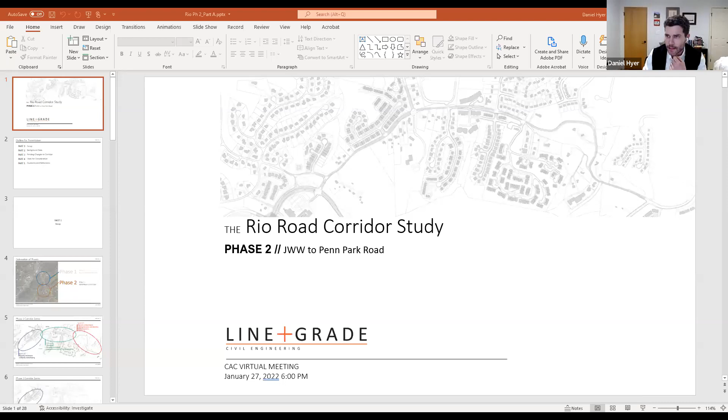So tonight, Rio Road Corridor Study Phase 2, and we'll be discussing specifically a portion of the corridor from John W. Warner Parkway to Pen Park. I misspelled Pen Park on the cover sheet, so please excuse that typo. Our presentation tonight is in 5 parts: a brief recap, a review of background data that our firm has been compiling and reading through, a discussion of pending changes to this portion of the corridor, a few ideas for consideration and thought, and then we'll get your feedback, ask some questions, and reflect together on what we've presented.

So with that, we'll start with part 1, the recap. Again, you've seen this before, we'll start with this probably every time. We're in phase 2, and this image shows where that is in relationship to the corridor as a whole. Phase 2 is from the city line to the John Warner Parkway intersection. When we met a month ago, we had an introductory conversation, and during that time we broke the phase 2 corridor down into 3 parts, north, central, and south, and each of those areas had different characteristics, different challenges.

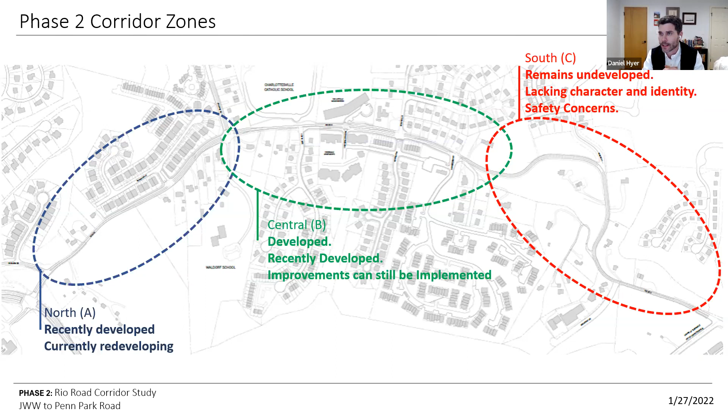Different futures in terms of what's available to the development community in the days ahead. For tonight, we're actually going to focus in on the north portion of the corridor. I think this is an appropriate place to start because there's a lot of activity in the near future here. Then next month, we'll work our way down the corridor each CAC meeting.

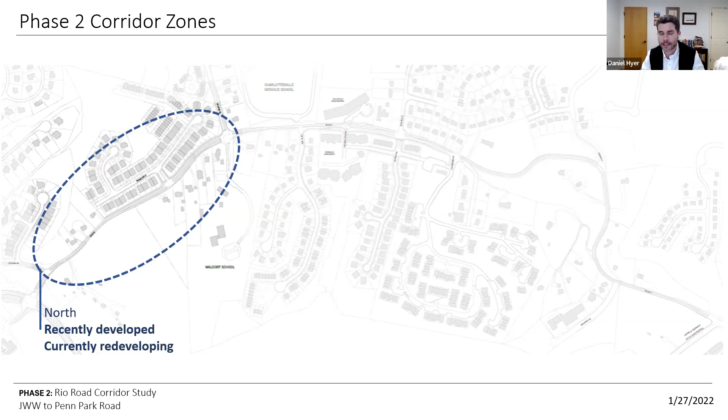As a brief recap, as we think about what we're wanting to promote and recommend, we do so through these four icons: safety, the character or aesthetics of the corridor, how we're creating connections for bikes, peds, cars and transit, and how well it works. Are we helping the corridor and the people who use it move with efficiency and safety?

So let's jump into the background data for part A, the north part of this corridor. I'm starting with published road volumes coming from VDOT's database. This portion of Rio Road, as of 2019, is carrying about 9,300 vehicles per day.

Pen Park Road carries about 4,400. Pen Park Lane, the road down to Lochlyn Hills, carries about 1,100. John W. Warner Parkway carries around 19,800, and Dunlora Drive carries about 2,400 vehicles per day. This is a baseline for our consideration—what every engineer in the area was using as baseline traffic volumes in 2019.

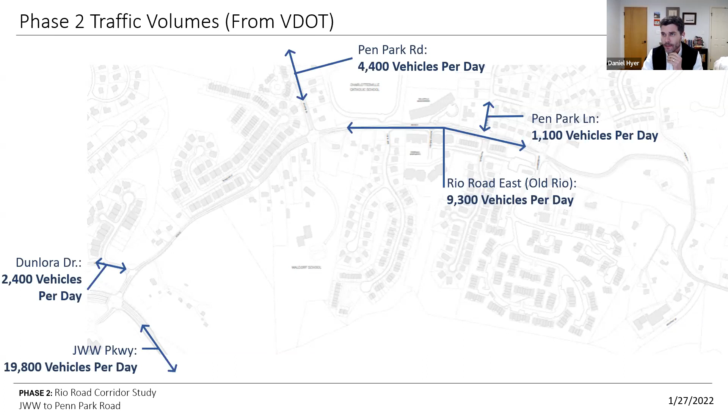But since 2019, things have been changing. Lochlyn Hills has continued to develop, bringing more vehicles and residents. The Lofts apartment has come online with more neighbors, high density multifamily. Dunlora Park has come online, contributing vehicles to both the north and south portions of this corridor, phase 1 and phase 2. These are projects not included in the 2019 volumes, but we're making sure to account for them.

There's also more work coming our way. Rio Commons is a by-right development coming in this northern portion of the corridor, contributing around 300 vehicles per day. Rio Point, which has been very visible, will contribute around 1,800 vehicles per day to the corridor.

And then there's a very big question mark. There are two very large farms behind Dunlora—we're calling it Dunlora Farm—several hundred acres zoned R4. If that were ever developed, it would certainly factor into traffic volumes in this vicinity. We've left that number blank for now since we don't know the viability of development at R4 density, but it's on our radar.

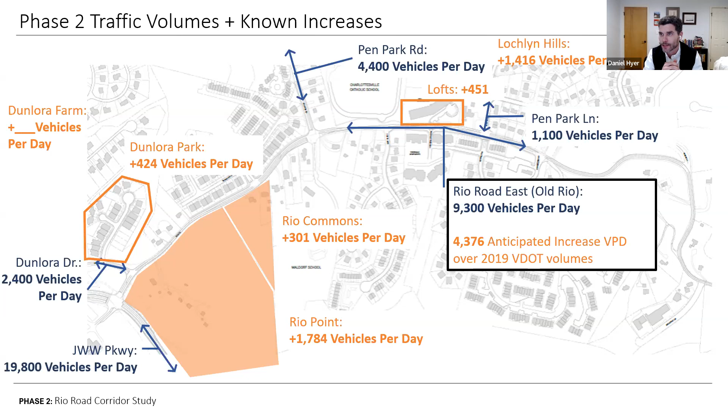Nicole's got her hand up, so maybe she knows something I don't. Nicole mentioned she thinks a site plan was submitted for that property last year.

Yeah, there is, I haven't seen it. We'll be providing that information. There's some question about what was approved and what density is ultimately achievable, which is why it's a question mark right now. I'll have a bit more for you at a later date, and we're forwarding that to the consultant. Please send that to us—I'd love to see where they're connecting their access point, because that could be a lot of traffic.

Daniel Bailey has his hand up. He says the continued build out of Belvedere, where he lives on the backside, connects into Dunlora, so he's not sure how that factors in. You can assume traffic is coming down Belvedere Boulevard, but currently a lot of it cuts through Dunlora instead, since drivers can hit the stoplight there if going downtown. He doesn't see that factored in here.

The continued build out of Belvedere is in the document we mentioned, the phase 1 report, where we talk about projected volumes of Belvedere specifically. If they're using Dunlora to cut through now, they won't be for much longer—when the new roundabout goes in, that left-hand turn toward downtown won't be there, so I doubt they'll continue doing that.

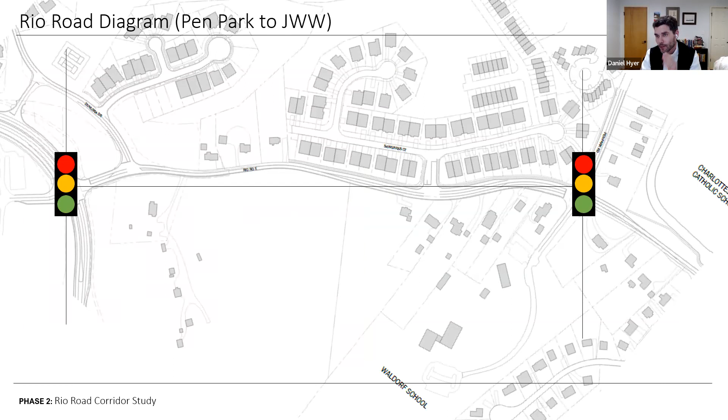This is me showing you what this diagram represents. On the left is John Warner, and on the right is Pen Park. They're both signalized intersections currently. So as we transition now away from a map to a diagram, that's what we're representing: Pen Park on the right, John Warner on the left.

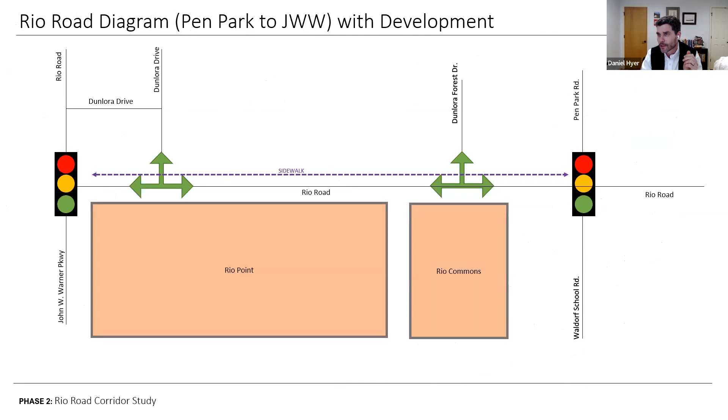In between, for this almost 2,000 linear feet of roadway between the two signalized intersections, we have Dunlora Forest, which is currently a full access intersection, and Dunlora Drive, which is also a full access intersection. Now we are introducing at least two more developments into this stretch of road.

And with those developments, we're going to see some changes in the near term. This is simply meant to show my work on starting to understand what's happening. But we can see that within 2,000 linear feet of roadway, the roadway is getting much more complex very, very soon.

We're going to see Dunlora Forest Drive basically become a full intersection with Rio Commons coming in directly across from that. Rio Point will have a full access intersection there, and they'll also have a secondary intersection that's a right-in only.

And that right-in only intersection shown—let me get my marker, where'd it go? There it is. This will be a right-in only intersection, but this is also not very far away from Dunlora Drive. So it's going to need an access management exception request to actually allow that.

This is where I think what Nicole was saying, VDOT can weigh in on things. VDOT's going to have to approve this current design that the Rio Point team is pursuing, because the spacing is not adequate with VDOT standards.

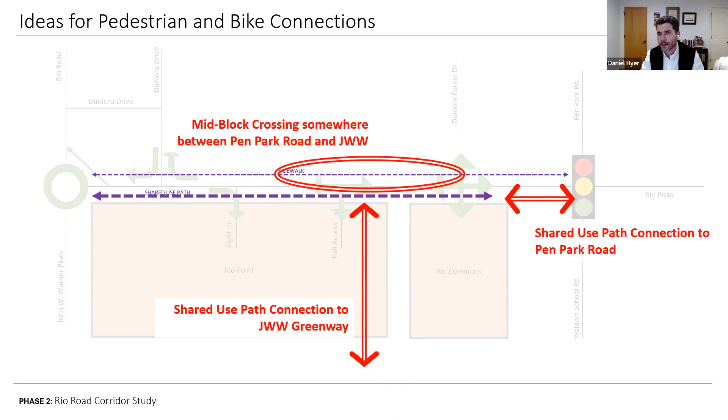So those are some bicycle and pedestrian connections we're going to be playing with over the coming month, and we'll obviously want to hear your feedback here as soon as I can finish my slides.

It's where you have turn lanes coming in and out, jumping in and jumping out, and a road that just continues to grow and swell and shrink in width to accommodate all of these turn lanes.

So I think we're going to want to talk a bit more specifically about what the character of this roadway can be, in consideration of all these different movements we'll have to accommodate.

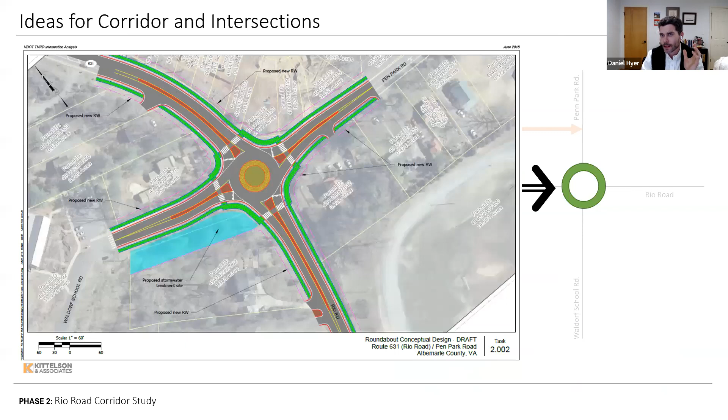So if we want to bring unity to this stretch of road, which is happening, how do we do it? Where are the opportunities, and what is the desire? I'm coming back to safety, I'm coming back to character, I'm coming back to connectivity and function. That's kind of our hallmark ideas of what we're trying to promote.

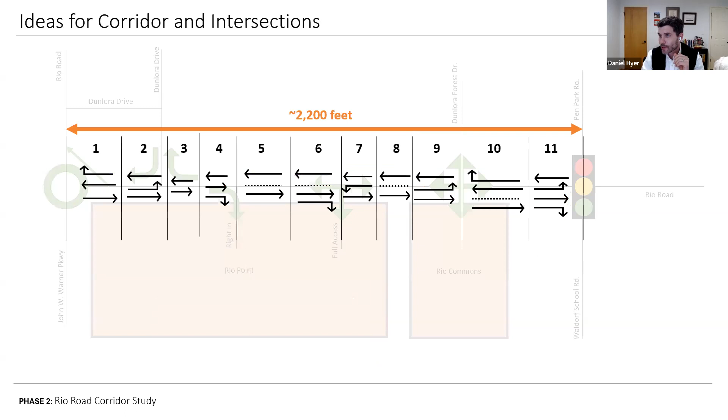So there's opportunities to improve what's coming and make it work, and there's opportunities to maybe guide it in a slightly different direction.

And so I'm gonna now open it up. I do want to hear from you all. I'm sure some of this was review and some of it may be new information, but I'd love to hear from you if the way we're thinking about this is at all resonating with you, if you think it's helpful, if we're missing the mark. I'd love to hear that too.

But we want to try to get out ahead of this so that we can start to advise on the way these neighborhoods front on the road, how they engage with the road, and how the county can plan to handle that work. So at least as an introductory question, it's kind of twofold.

We can try to work on the typical section and create uniformity, but the roadway will be broader and it'll look like what we showed. Or we can try to improve the intersections and let the roadway respond accordingly. So here's those visuals of two ideas of how we can be approaching this.

So I'm going to open it up to Marty at the moment, or whomever, to begin to work through some conversation. But this is our first pass. So what we want to do is hear from you, hear your thoughts. Then over the next month, we're going to try to put some designs in place. So we're bringing this to you tonight in diagrammatic and representative concept form so that we can hear from you and then bring back some drawings in a month. So with that, I'd love to let our conversation begin.

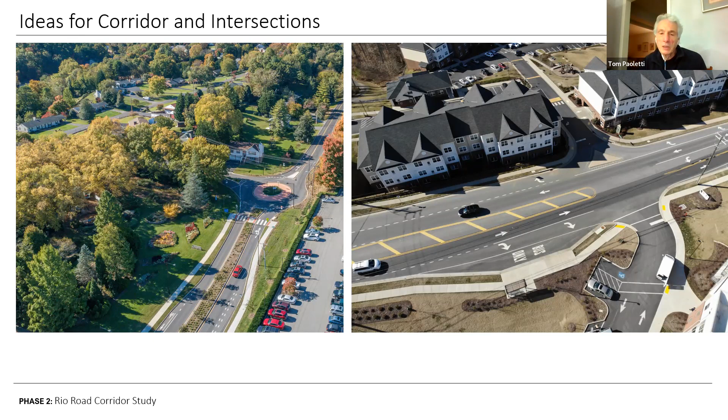Yeah, I'm just curious, the counts that you had, the 9,300 and the anticipated counts of another 4,000 to 5,000—for this kind of road, how heavy is that compared to other roads you study?

I mean, every road is different. I don't want to say that it's heavy. A two-lane road, like think about John Warner Parkway—it's a two-lane road that's carrying like 20,000 vehicles per day. I don't think we should let the numbers distract us from all the ways that cars move. These are just ideas, these are numbers, these are analytics. It's not necessarily representative of you, Tom, going to the grocery store in your car on Tuesday. These are just kind of how we think about things analytically. I think the road has the capacity to handle the volume of vehicles.

I think how the intersections work is probably the bigger question of how this will be successful or not. That's kind of what I was looking for. Given the road and the closeness of all these people living there, it's a lot of traffic, I guess, but I don't know what traffic counts relate to. I'm not an engineer, so I was just trying to get an idea.

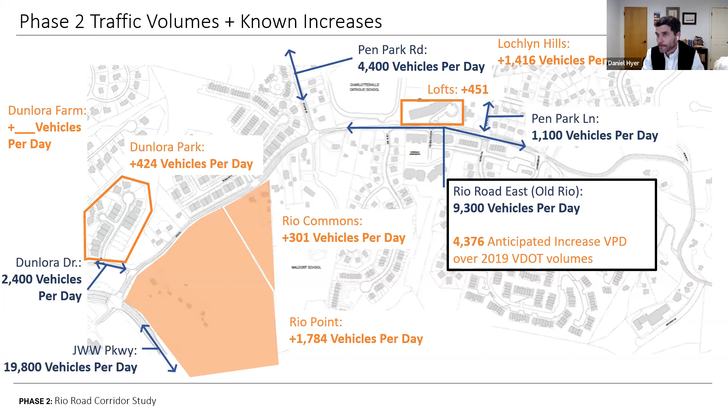Okay, Tom, I would say this - I seem to remember reading that before John Warner Parkway, the road had about 17,000 vehicles per day, 15 to 17. We can check that, and you should. That would give you an absolute maximum capacity, a number if somebody's interested in it. I'll go back to Tom and see if I can dig that out again, because that's in some of the history.

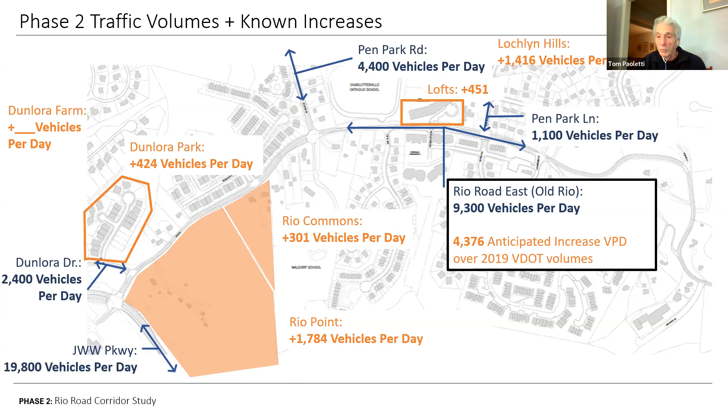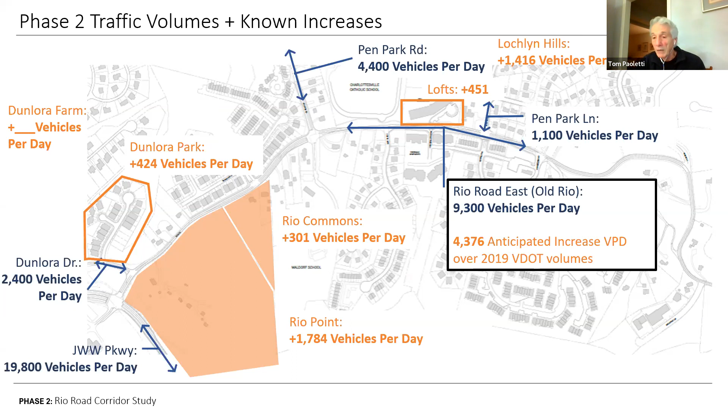Mark, just to add, when it was that high before John Warner, there was also a lot less traffic along this route coming in at these intersections. Dunlora Forest wasn't there. I remember when Pen Park began, River Run was developed. Before those days, it didn't matter because no one else was coming - it was just all from downtown out to 29, nothing in between. But now we've got all this stuff in between, plus added traffic coming down from farther north to 29. So you've got a great increase in traffic, a lot of it very local, and the rest not. It's a very different picture from what it was 5-10 years ago. I'm not justifying it, I just was trying to add the information.

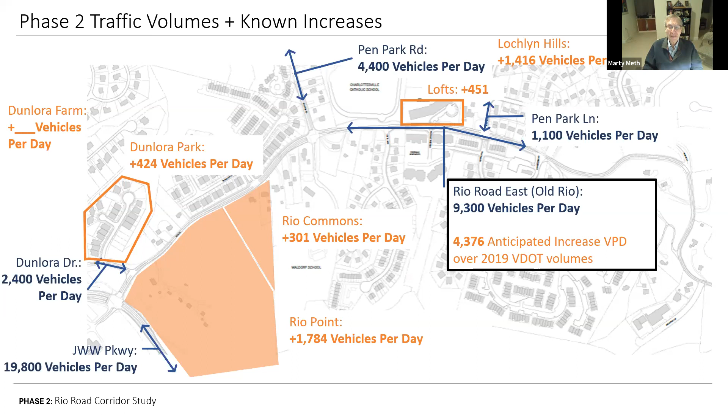Okay, thank you. We'll come back there and see how Daniel handles it.

Peter, please. Daniel, thanks for your presentation, I appreciated how you did this. Generally, based on reading reports and studies and my own use locally, nationally, and internationally, bad intersections and dumb traffic lights - I don't mean dumb by being there, but just how poorly they work - the more we can eliminate those and use traffic circles, the better for vehicles. I'm certainly a fan of road diets to be more pedestrian and bicycle friendly. That's a kind of overview, and it seems to fit from the little I've seen here, at least enough to have it designed that way.

My question is, in this section, how it would impact the pros and cons on public transit being an integral part of this corridor today and going forward. Peter, is your question about how public transit would be affected by the intersection options? The two basic options you're presenting - kind of old school and new school - pros and cons for public transit.

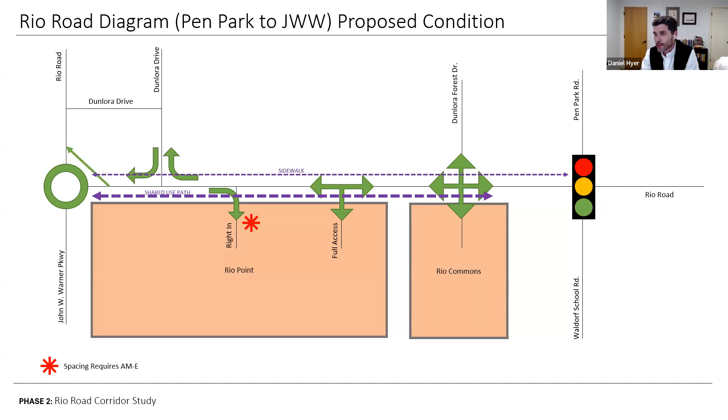Well, I can't speak for public transit, but what I can say is there are trends in how they make decisions about what is preferable. In the past it was bus pull-offs, and now what they seem to prefer is actually using turn lanes as a bus stop, which would look more like this. So what we see here, I don't think they actually prefer this anymore - they probably wouldn't do this today, they'd just use the turn lane if we were to do this now. These things change every 3 to 5 years, depending on who's in charge of the transit authority and trends in design. So transit, I think it can be equally integrated either way, to be honest with you.

So, I think I want to have a little more conversation with the Rio Point project about what, if anything, they're planning to do to integrate transit. I'd like to learn more about that. It's certainly on our minds to explore a little more, but we haven't made any determination yet. That's a great question, Peter, and we'll make sure we come back with some more thoughts on that next time.

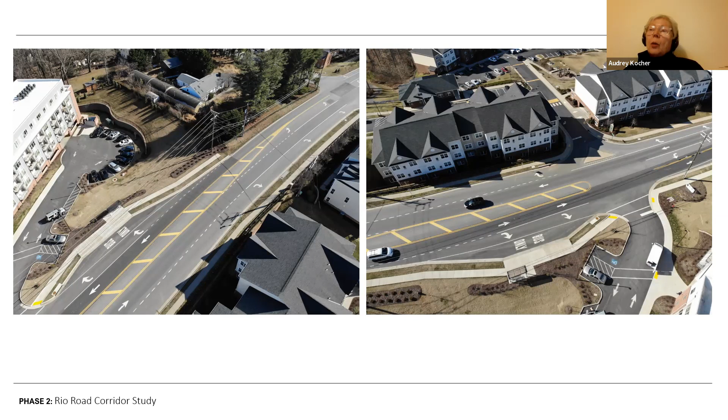Thank you very much for the presentation. It looks beautiful and well thought out. Most of us here are asking questions about amounts of traffic and how that would impact designs that would alleviate those traffic issues. My question goes to that too, in a way, but in a different way. Are there ideal amounts of traffic on a road that make roundabouts more helpful? Or does traffic get to a point where the roundabouts are not helpful?

I hate to be an engineer when I get questions like this, but it's just how my mind works. It can be both. Roundabouts can be really, really helpful to move traffic continually. So can signalized intersections. I think it has a lot to do with the presence of pedestrians and their ability to cross. Pedestrian crossings can actually make a signalized intersection operate much less effectively because of the crossing, like the current John Warner Rio intersection is a fantastic example of this. The crossing distance for a pedestrian is very long, like 100 feet, and that takes a long time. The timing for that signal takes a long time, and that can throw the intersection into a poor level of service.

Roundabouts generally operate more effectively because of how they manage the traffic, and they generally seem to be safer for pedestrians, especially if they're single lane, small roundabouts. I'm not saying it's a one size fits all solution. I think for me, the roundabout shown in this presentation is more of a thinking exercise of which solution solves more of our challenges, because neither situation is perfect. I think we want to try to make the best situation. So I want to hear from you: do we prefer to manage the roadway, or do we prefer to manage the intersections and the design choices that come with that? I don't know that I'm being helpful at this point answering your question.

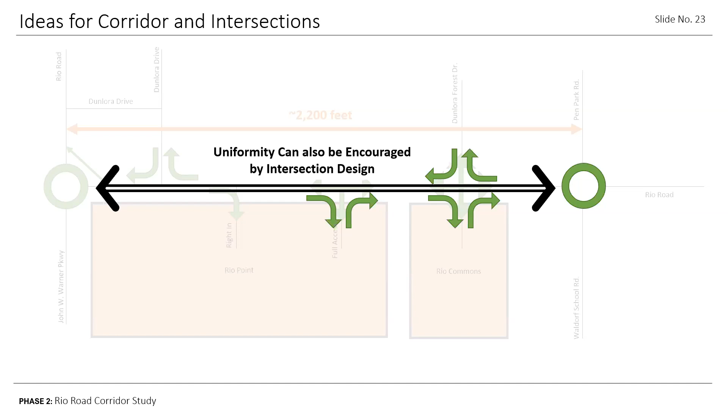Unfortunately, as we urbanize, it does appear that we have a bit of a conflict with VDOT, who really likes to focus on moving traffic and moving traffic fast. And as we urbanize, those 40-mile-an-hour speed limits on Rio are going to have to back down. So I like what I heard, and I look forward to seeing it. I'll probably continue to like it even more. So thank you.

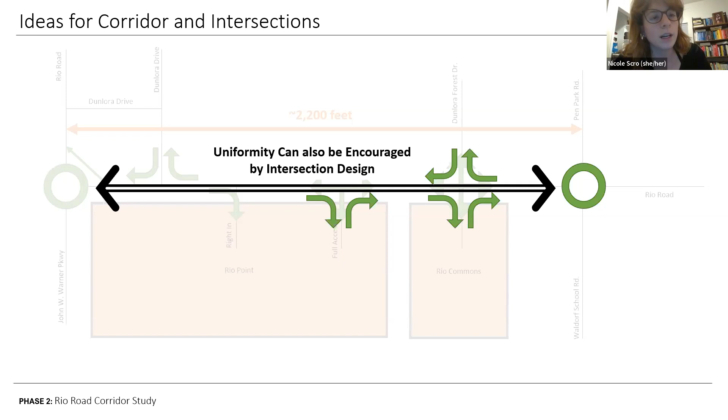And then my other question is, I think you showed some crash data. Is there a specific intersection that tends to have more crashes? I remember when they submitted the smart scale for Pen Park, they were getting - if putting the roundabout and eliminating some of those intersections would help alleviate some of those crashes, that's also a consideration for the roundabout versus the other way.

Yeah, no, it's a good question, Nicole. I think the crashes on the corridor, at least this portion of the corridor, seem infrequent enough - it's not like it's hitting the same rear-ending every afternoon like you might in New York City. So it's hard for me to pick up on a trend of what's happening, but obviously intersections are going to be prone to some sort of crash. But ironically, there's actually 8 crashes between Pen Park and Rio Road.

You go on the VDOT website, you can read what the crash was and how it happened. And I know I clicked on one of them - one was a deer, of course, that happens in Virginia. One of them, it didn't say drunk driver, but it was a single vehicle, just kind of - I forget the word they used - it's like a nicer way of saying the person was not paying attention.

So one of the things we'll be doing in the month ahead is translating this into more of an analytic understanding of the accident, so we'll be able to say more specifically what that data is telling us.

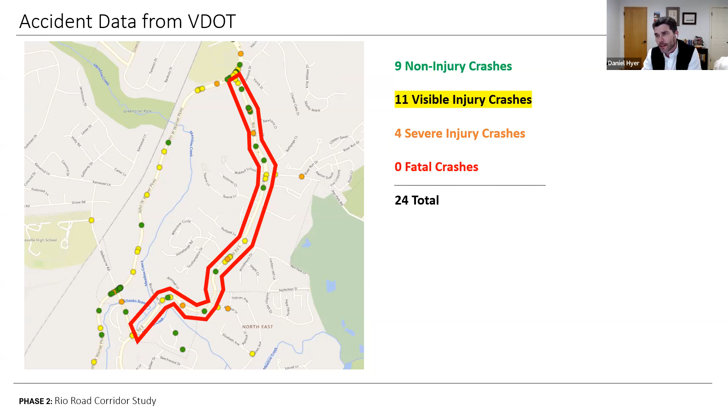It's a good point though. With regard to the roundabout size, that picture you saw is about the smallest roundabout you can make that accommodates all the vehicles a designer would need to. This is right adjacent to a college campus, so we know it's got buses and kids that ride the public school bus. There's a couple ways you mitigate how they can turn. One is by the size of the apron—you can see the apron on this roundabout is relatively large compared to the grass area in the middle. So this is a pretty good representation of what I think the size of the roundabout at Pen Park might be from a footprint standpoint.

Cool, that's great. Okay, thank you.

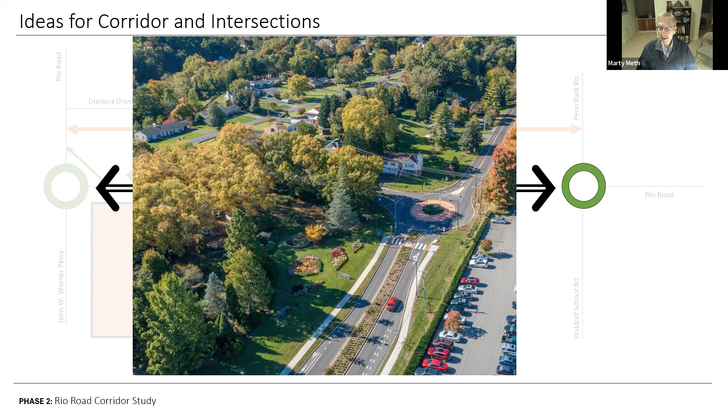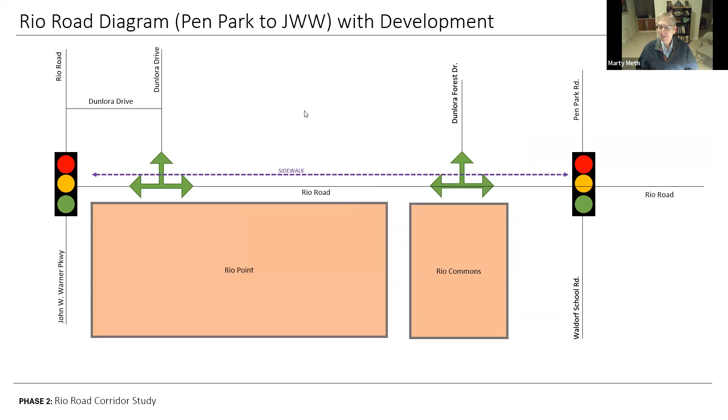Let me ask a couple of questions, if I might, Daniel. First of all, maybe it could be a little bit clearer. If you look at the road there, it's built up essentially on both sides, and it's a 2-lane road, except coming out of Dunlora Forest there's a hatched area where you could make a left turn. Beyond that, I don't see any space for it to be widened at all. So I don't understand the two options you're proposing—maybe you could explain that a little bit more.

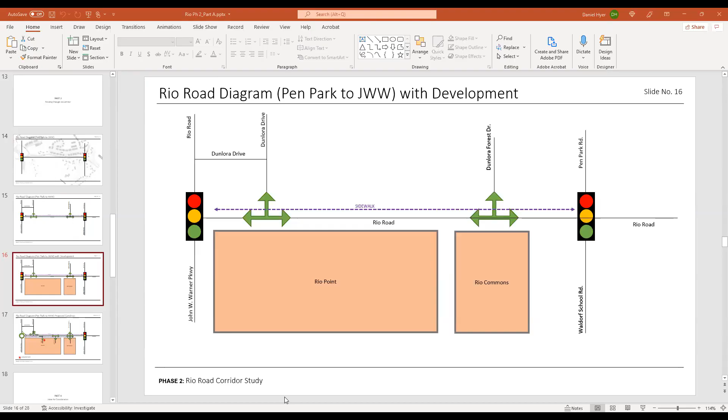I'm not sure—can you see that I just changed to a completely different presentation? I can't tell if you can see my screen or not. I can see your screen. Can you see that I'm making a picture bigger? No, I have a picture. Okay, hang on, let me re-stop share. Okay, let me try again, just making my screen. Okay.

I kind of want to disagree with what I heard you say, Marty, if I understood you correctly. I don't think this road is developed on both sides—I think it's developed on one side, and the development of the other side is coming. With that will come—this road right here will become like the road I showed you down by the loft, because they're going to widen the road to the other side. So when they come in, this road's going to end up being this wide, or maybe even wider, because this will become the turn lane on either side. There'll be a through lane next to that, and then a turn lane next to that. So when they widen the road, they're going to go that direction onto their property and give that land to the county or VDOT and proffer it over. So as I understand it, the widening's coming—it's just going to go to the other side.

Okay, well, we'll have to see how the site—I didn't quite read the site that way. I saw there were some extra turn lanes on the proposed draft site plan included in their proposed amendment. I didn't read it quite as wide, but you may be right. I'm not a civil engineer, so I'm not clear. You need to look at their site plan a little bit. I'm sure you have. Oh, I did all week—I've looked at it pretty much for hours this week. Yeah, I know, okay.

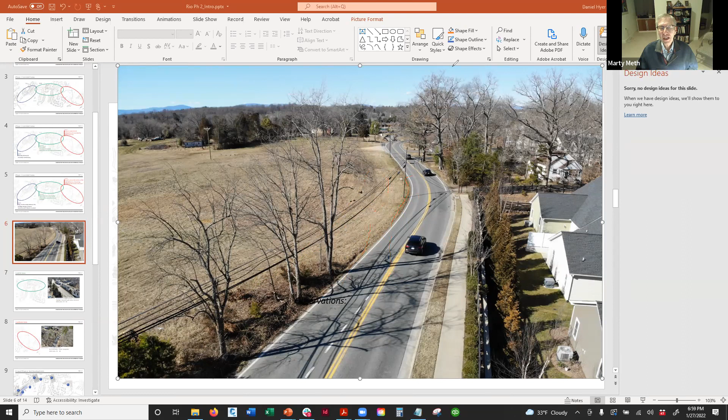So the other thing is, if you put a roundabout at Pen Park Road, and the way you drew it, if I understood what you said correctly, you could only make a right turn out of Rio Point. Is that right?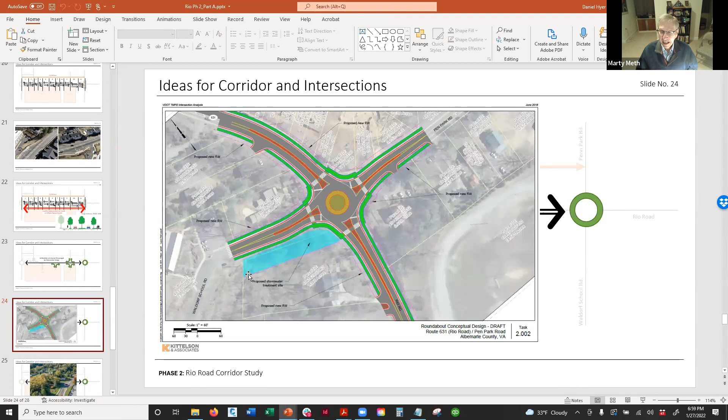That's a very early idea. If you did that, then all 1,800 cars—half of those would have to go to the roundabout if they wanted to go downtown, or go onto John Warner and then come around two roundabouts, which is what you're proposing.

Yeah, there's a term for it—I believe it's called a Super Street. It's kind of a modern thing. I'm not saying this is the solution, or that it's the solution the whole way down the road, but what it does do is let us, instead of taking up the entire roadway with turn lanes, keep the road narrower and use that space for other things, for other users.

And so it could be a hybrid of both. I hear what you're saying. If we went with something like this, every single person leaving out of Rio Point is going south to Pen Park, and will either continue south on Rio, or they'll slingshot around and go down to John Warner. Maybe it stops right here, halfway, and maybe this remains a full access intersection. That's another idea too.

The same thing would apply to the people at Dunlora Forest. If they wanted to go south, now they're going to have to go around two roundabouts as well.

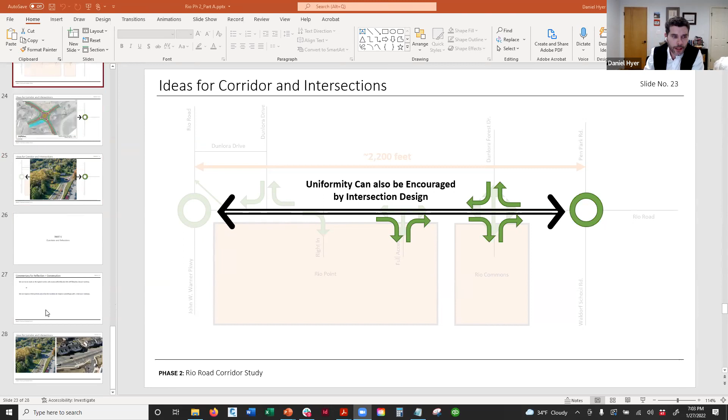Which road do you think is more prone to have speeding? I bring these two pictures back up. Which one of those do you think? I understood it's a trap, in the sense that the roundabout will slow down traffic one way or another. I understand the point you're going to make.

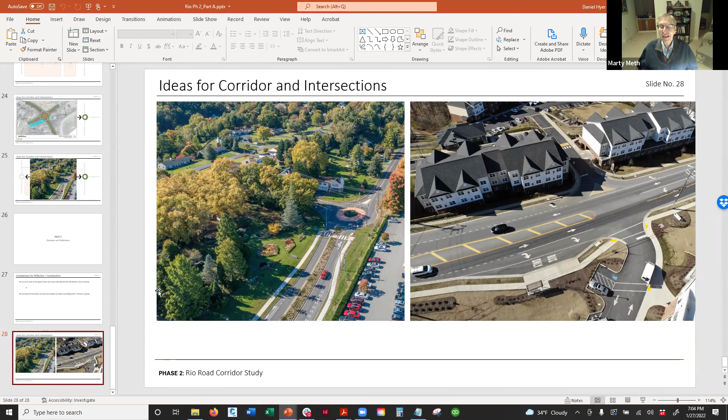On the other hand, the traffic light also stops the speeding too. And it makes the turn out of Dunlora Forest entrance easier to make, because otherwise with the roundabout, well, then we would only be going right, as we talked about.

But are you, Marty, saying you want to have a traffic light at Dunlora? No, I'm saying there's a traffic light at Pen Park. Leave it there. Yeah, maybe so.

So I understand that a roundabout begins to slow down the traffic a little bit. I'm well familiar with that, it's been drummed into us. But on the other hand, it then has those other inconveniences that I brought up. Let me think if there's any other points.

Yeah, there's not a perfect solution here, or anywhere. I think we're trying to see what you folks say that we might learn from, as we consider what might be some good options. Maybe we just continue to pursue two options here for a while.

Well, have you also looked, as I pointed out, at Dunlora Forest—if you make a left turn out of there, there's a hatched area that could be a protected left turn lane, assuming there's a traffic light, right?

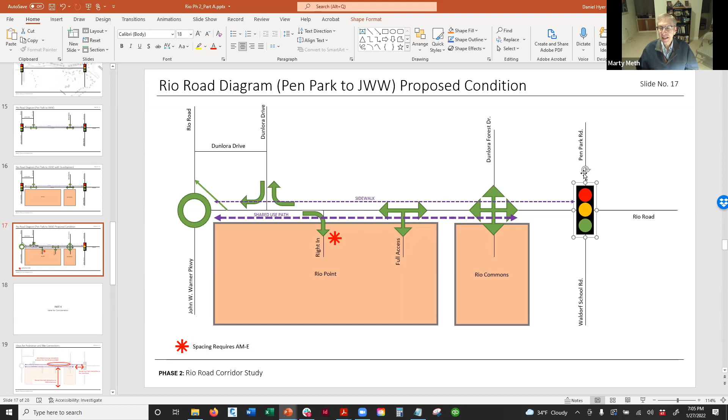I think we would like to see that as one of the potential options. I think people in the community would like to see that. Thank you, okay great, we'll make note of that. I have nothing else.

Let me ask if Lee has his hand up. Excuse me, Lee.

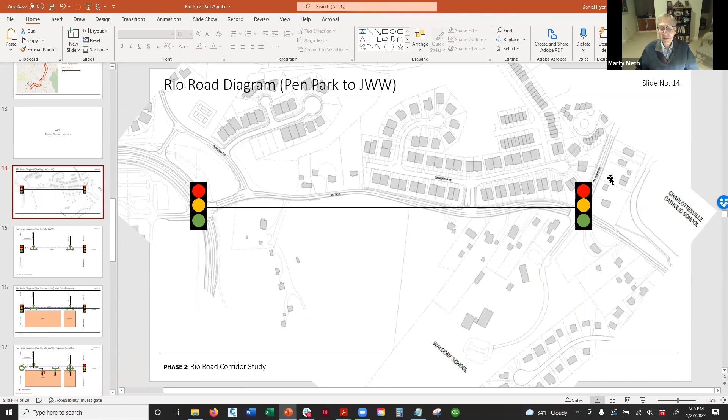Well, there's always option 3. I can share my screen for a second and show it to you, and then you can go from there.

It's Marty's meeting, yes, go ahead. You'll have to unshare, Daniel, and Lee, go ahead please.

That is, put the roundabout at Dunlora, and then make the Rio Point entrance right across from it. That has the advantages of both options. It keeps the rest of Rio Road south of that pretty much intact, handles the pedestrians on both sides, and slows down the traffic. So just a thought. That would work as well.

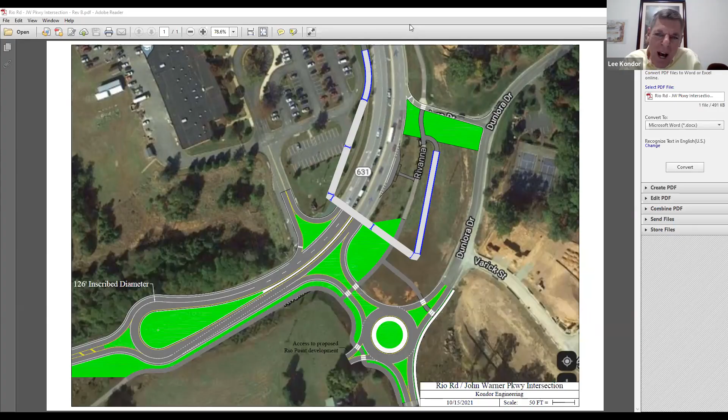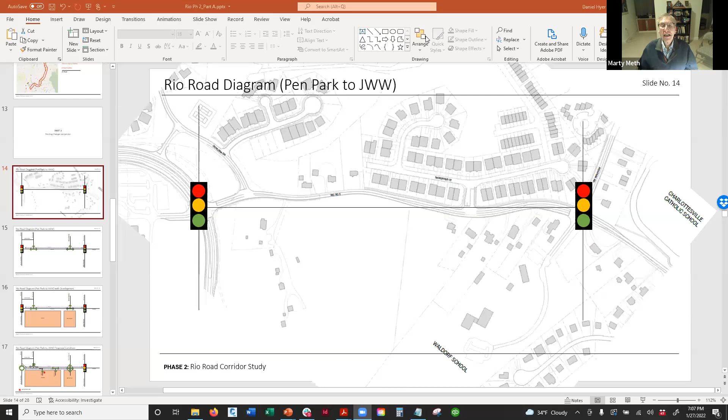Thank you, Lee. Thank you for sharing that with us. Definitely think on that a little more. Thank you. I think we've taken enough time. David Bennett, you want to close this session? No, I was going to ask you, Marty, I know we're kind of running short on time.